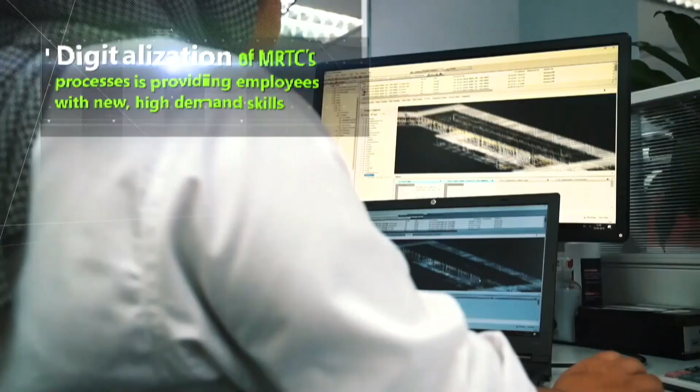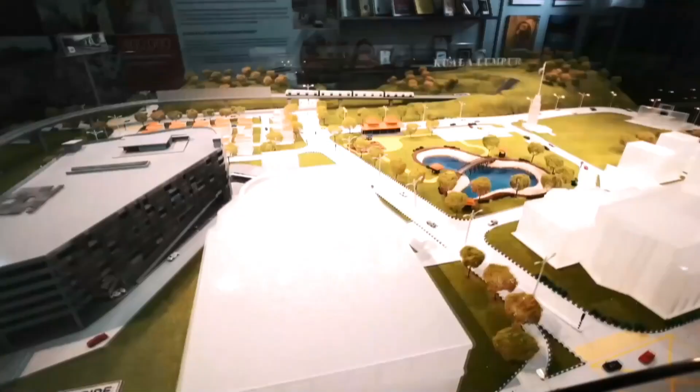The KV MRT system is providing a major boost in the integration and efficiency of urban public transport. The country's largest infrastructure project is already having a significant economic impact in Malaysia and within the region. As the first metro project in Asia Pacific to ensure greater collaboration and efficiency across teams with building information modeling, or BIM, methodologies, the SSP line is expected to be delivered on schedule and on budget.

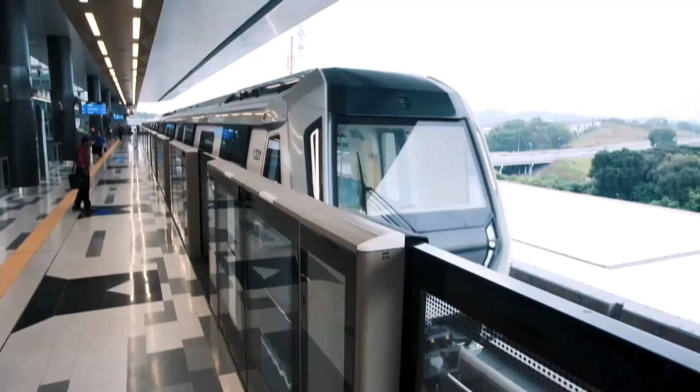Taking advantage of digital technologies for its SSP line, MRTC is improving connectivity for local and regional businesses, expanding workforce skills, attracting international investment, and increasing property values across the Klang Valley region. Digital transformation is helping transform the lives of millions of Malaysians today in preparation for a better tomorrow.

Earlier this week, I got a chance to meet some key Queensland government agencies, and I'm really impressed to learn that there's a lot of opportunity for Brisbane for infrastructure development. As one of Australia's fastest growing cities, there are parallels between Brisbane and Kuala Lumpur, notwithstanding the differences in population and population density, of course.

Brisbane has around 2 million people spread across 6,000 square kilometers, while KL has 6 million people in around 2,800 square kilometers.

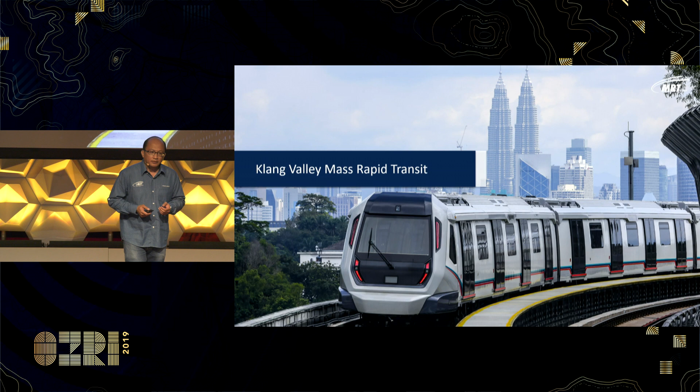So I have come today to share with you the story behind the Klang Valley Mass Rapid Transit project, and also to take you behind the scenes of what the media has dubbed Asia's most ambitious engineering project, and to show you details on how MRT Corp has embraced digital engineering in the MRT Sungai Buloh Serdang Putrajaya project.

It all started back in 2010, when the Malaysian government had the vision to create a new economic region, called Greater Kuala Lumpur. This economic region is designed for massive income spillover that will positively impact our gross national income.

20-20 vision is the government's vision for the Greater Kuala Lumpur. The first 20 is to turn Greater Kuala Lumpur into one of the top 20 most livable cities in the world, and the second 20 is to become one of the top 20 economic cities in the world.

As the economy grows, the population is also expected to increase, hitting more than 10 million by 2020. This increase will create high demand for an efficient, dynamic intra-city public transport system.

To address the future demand for mobility in Greater Kuala Lumpur, a 3-line mass rapid transit system has been planned, comprising 2 northwest-southeast radial lines and 1 circle line looping around Kuala Lumpur. This project is called Klang Valley Mass Rapid Transit.

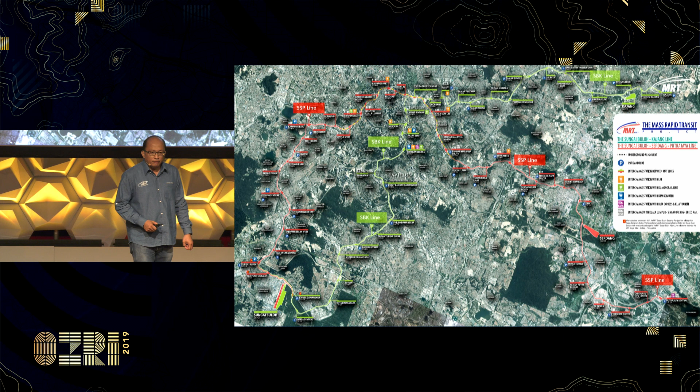Shown here is the entire KV MRT alignment for both MRT Line 1 and MRT Line 2. The MRT Line 1, or SBK, displayed in green, was opened to the public in July 2017, and the MRT Line 2, or SSP line, displayed in red, is currently under construction and due for completion by July 2022.

This is the conceptual alignment for our third line, the MRT Circle Line. The project was due to start mid-2018 and be completed by 2022, but it was put on hold in view of the current government's financial standing.

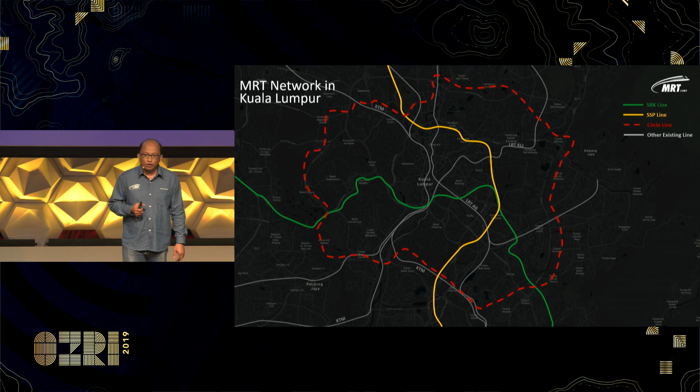The entire alignment of the SSP line is 52.2 kilometers, consisting of 13.5 kilometers underground tracks and 38.7 kilometers elevated tracks. It will serve a corridor of population around 2 million from Putrajaya to Sungai Buloh. The MRT line will have 35 stations, of which 24 are elevated and 11 are underground.

The picture shown here is the rolling stock, which was awarded to Hyundai Rotem from South Korea. This rolling stock will include 58 4-car driverless electric trains, which can carry up to 1,200 passengers at one time.

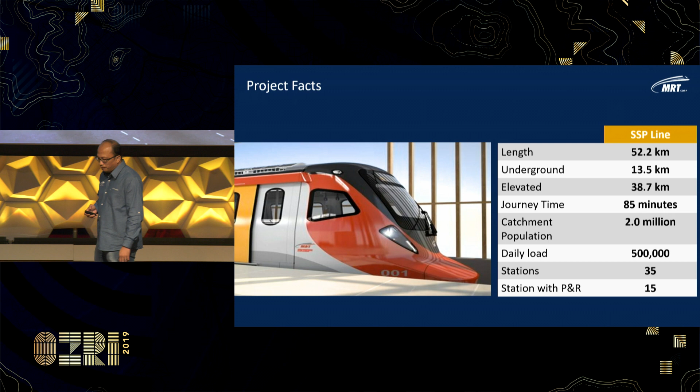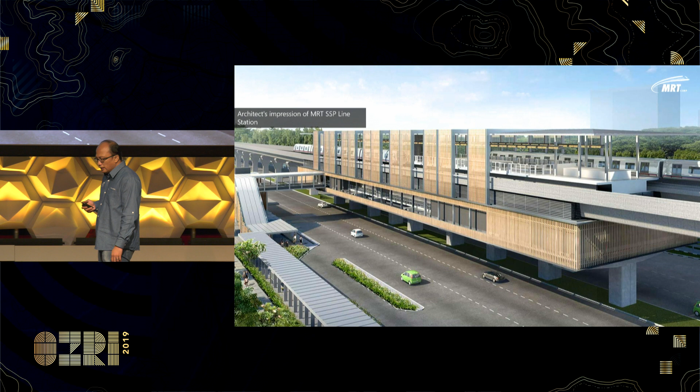This is the architect's impression of the MRT SSP line elevated station. The elevated station architecture was inspired by the concept of the Serambi at the village house or longhouse. This concept provides open ventilation, natural lighting, and natural visual effect via the play of light and shadow.

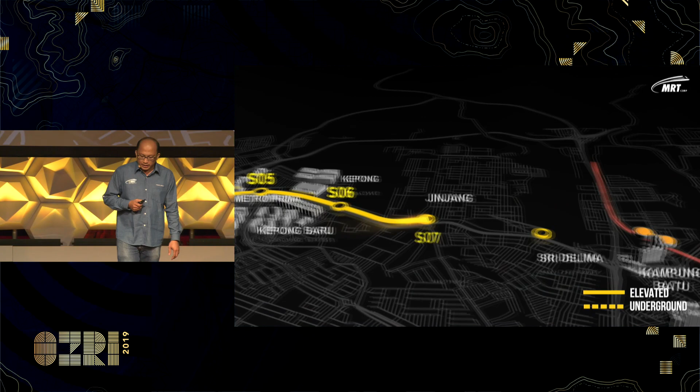The SSP alignment will start from the existing Sungai Buloh depot and pass through residential areas in the northwest of Klang Valley, then through a few suburbs, mainly residential areas. Once it reaches the city center, the train will start going underground from the North Portal, going through the major commercial area, including the Petronas Twin Towers, and back to the elevated alignment at the South Portal.

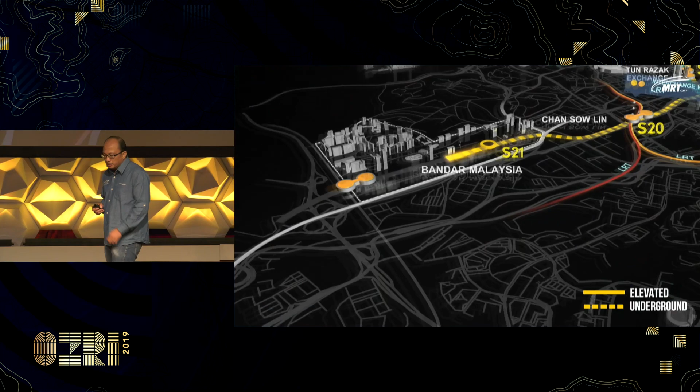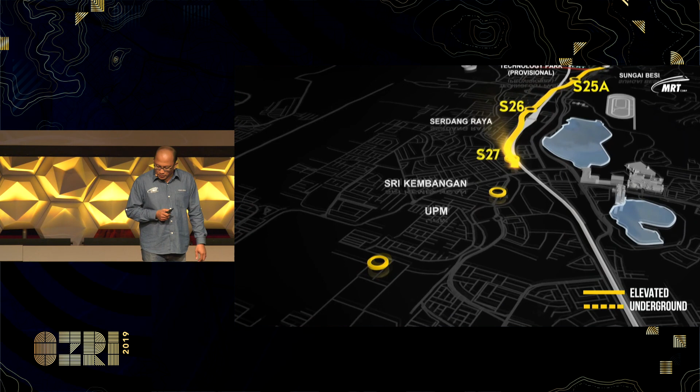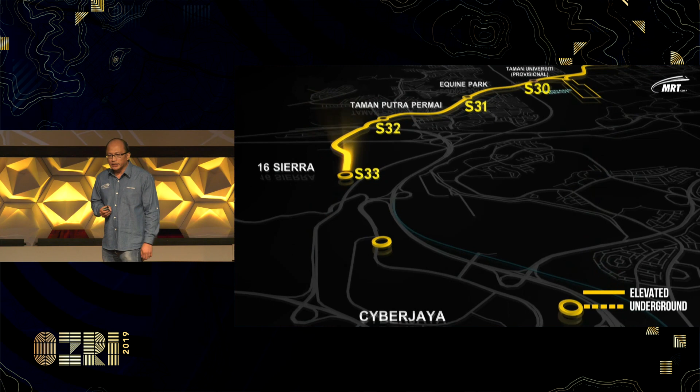The line will continue to southeast of Klang Valley, which will pass through other suburbs, mainly residential area, universities, our second depot, commercial area, residential area, and our IT park, which is Cyberjaya, before terminating at Putrajaya, our government administrative center.

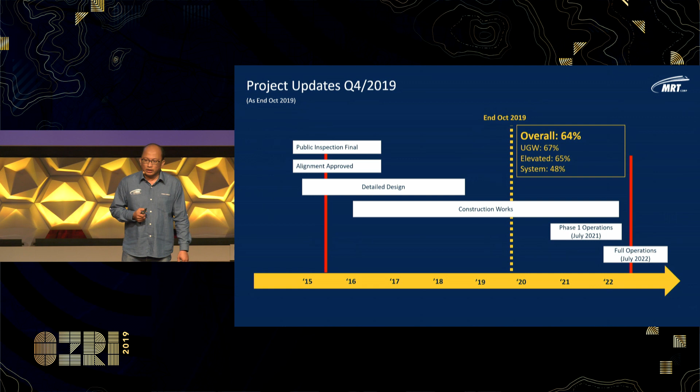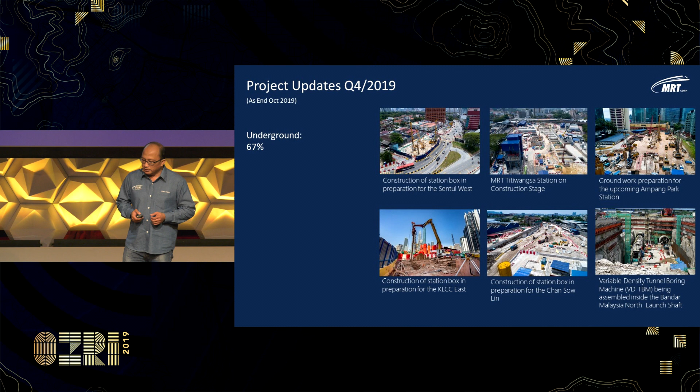Next, I would like to share some of the challenges that we have in our project team and how digital engineering has become a great help to overcome all these challenges. The MRT SSP line consists of over 1,000 multidisciplinary professionals like architects, engineers, planners, geologists, and controllers. These people are the heart of MRT SSP line project, and they are responsible to deliver the project within time, within budget, to the government of Malaysia.

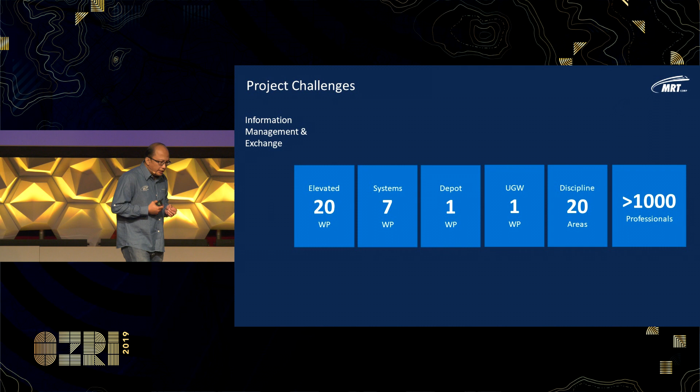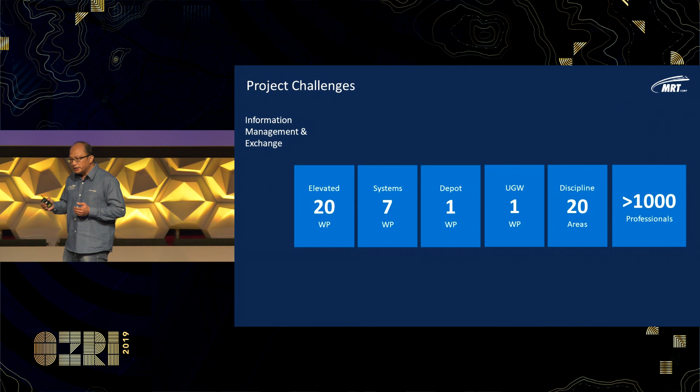Our work involved the design and the construction of the SSP line project. These include underground station, elevated guideway, depot, tunnels, as well as the electrical and mechanical system required to complete a fully functional railway system. It is very important for us to ensure the information available across the project is accurate, up to date, and no misinterpretation between stakeholders. We need to ensure the design information, as-built, and as-built validation has been managed and kept within the project, as the MRT structures will have a long lifespan, which is over 100 years.

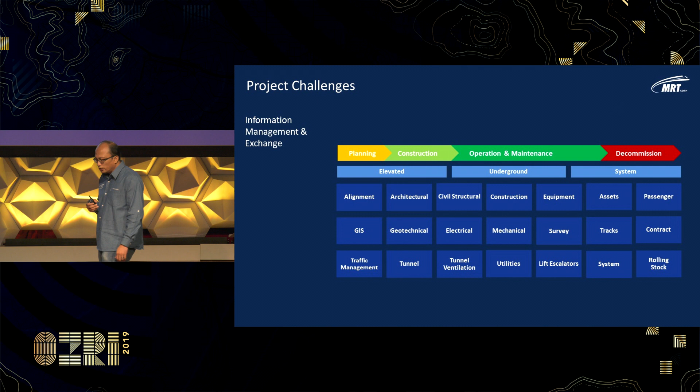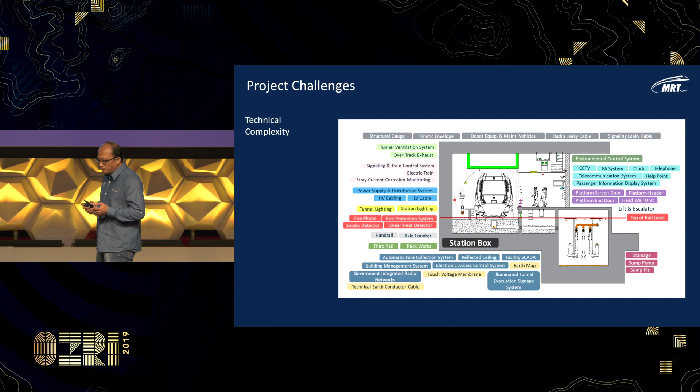Next is the technical complexity of the design. This illustration shows how complex it is to design and construct the MRT station. This involves cross-functional and multidiscipline fields within a tight schedule. The engineering design information needs to be organized systematically and in a structured way so that it is easy to retrieve. The attributes need to be updated correctly according to the project classification.

To overcome these challenges, MRT Corp has embarked on a digital transformation program for the design and the construction of the project. The main objective of the digital transformation program is to improve the project productivity by 35%. And in order for us to achieve this, we are pushing 6 digital engineering initiatives into our project. We are mandating the use of BIM Level 2 framework for our underground and system work contractors to carry out design and also construction in the common data environment following BS 1192 standard.

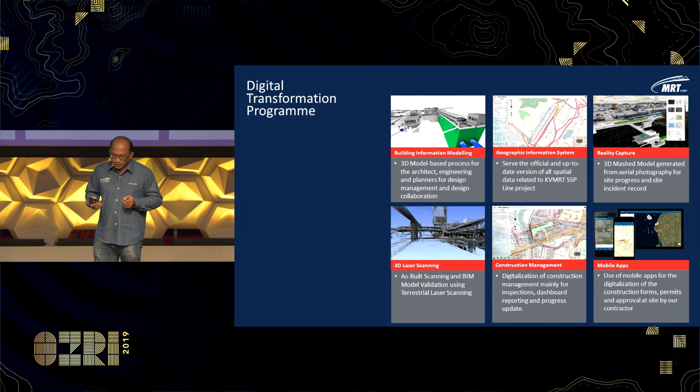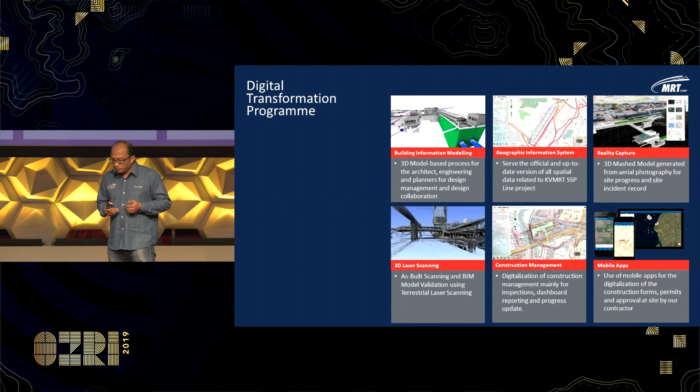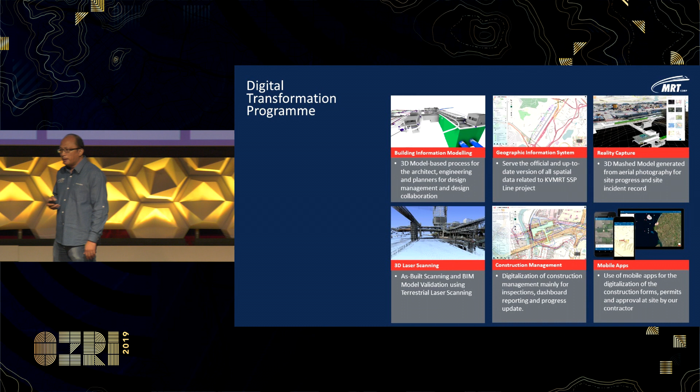We developed a GIS web portal to host all our design and engineering information, utilities, as-built and construction models. We also utilize reality model drone for site progress and monitoring. We also use 3D laser scanner for as-built model validation and verification. Together with our contractors, we are pushing paperless, mainly for the inspection, dashboard reporting, and progress update. Finally, we're also pushing the mobile app for the digitalization of the construction forms, permit, and approval at site by our contractors.

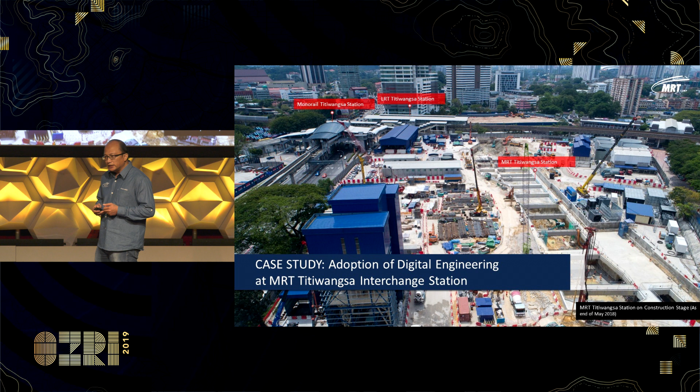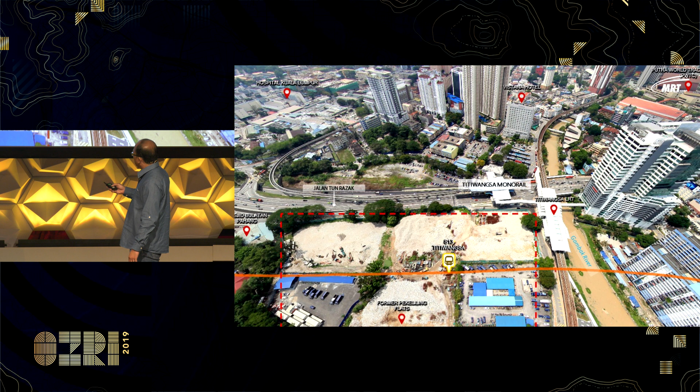Next, I would like to showcase some of our work on how we have applied digital engineering in the design and the construction of the MRT SSP line project. The MRT station is one of the stations located in the city. So this is the future station that we are going to build. And this is the existing station. This monorail service and LRT Titiwangsa service is already there. So the future MRT station is intended to be an interchange station that will be integrated seamlessly with these two stations.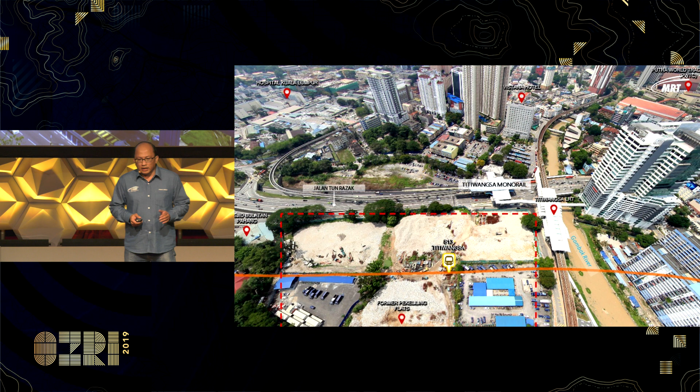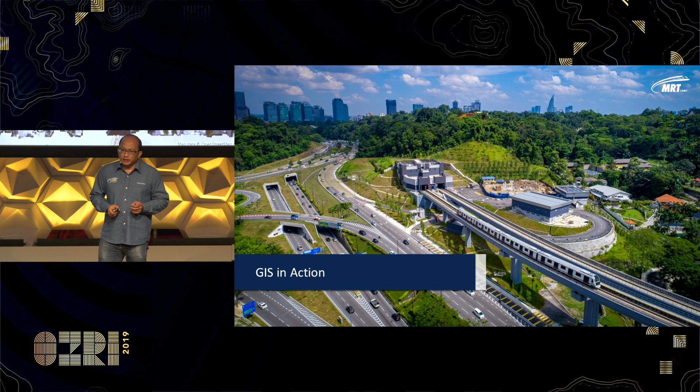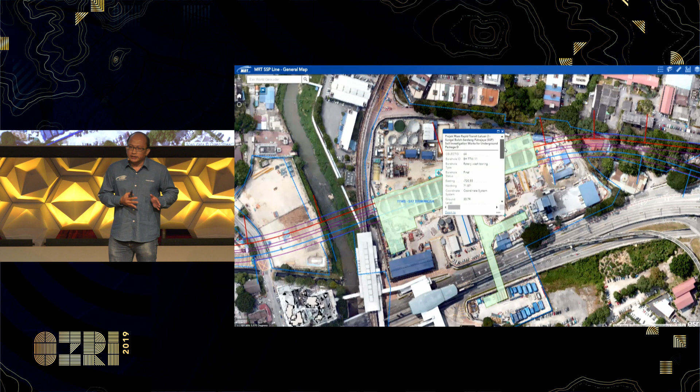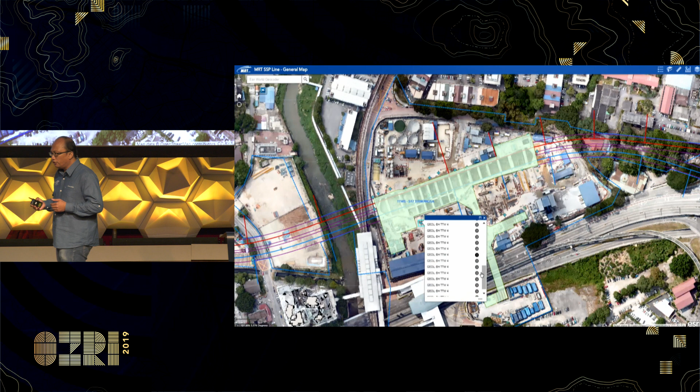Now, I would like to share how GIS has been used in this program. For this project, our geospatial portal is using ArcGIS Enterprise. We are currently compiling all engineering drawings, spatial information, documents, and records into a centralized mapping viewer. This video shows a collection of soil investigation boreholes that we have converted from AGS4 format from our geotechnical team. The AGS4 is a text-based format, and it contains all detailed information about soil profile. For us to bring this data into GIS, we have developed spatial conversion tools, and now the geotech engineer will have the ability to see the borehole reports together with the visual representation.

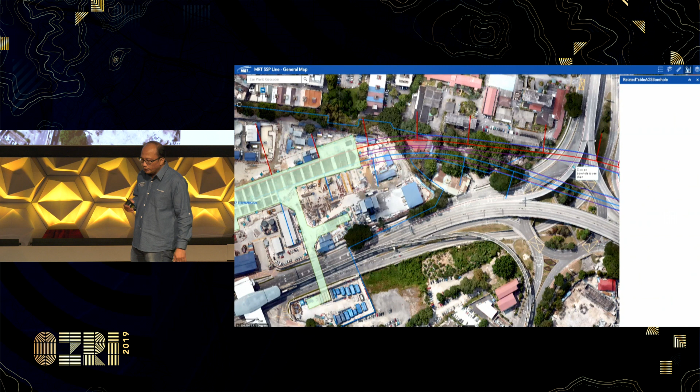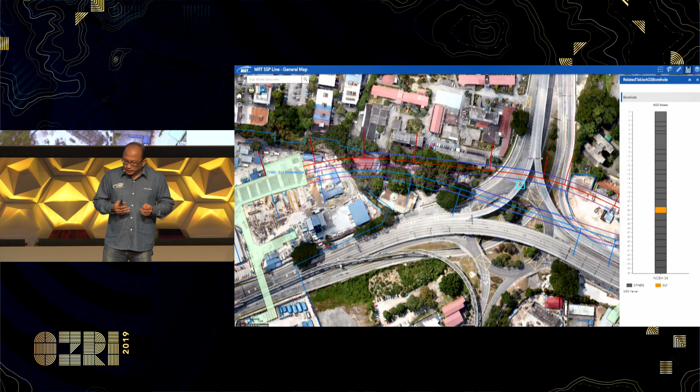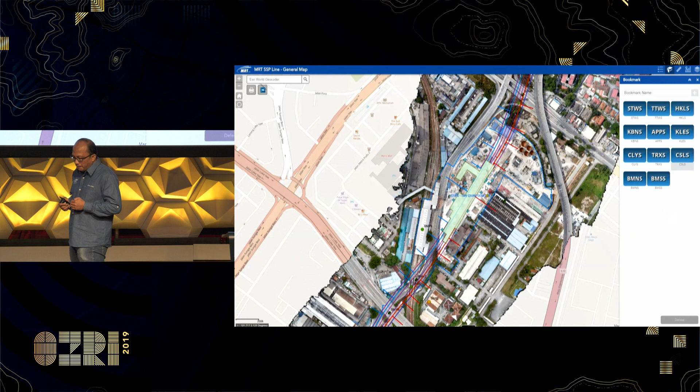We also created a widget to highlight the depth of the soil type for each borehole. It will provide a graphical representation of the soil depth. Here is the video showing a few boreholes in a customized widget viewer that highlights soil profile and soil depth.

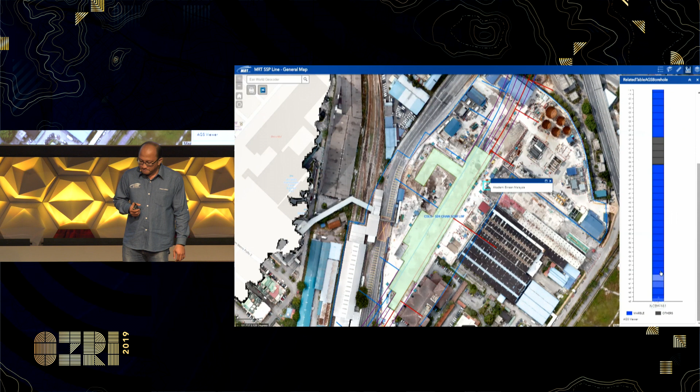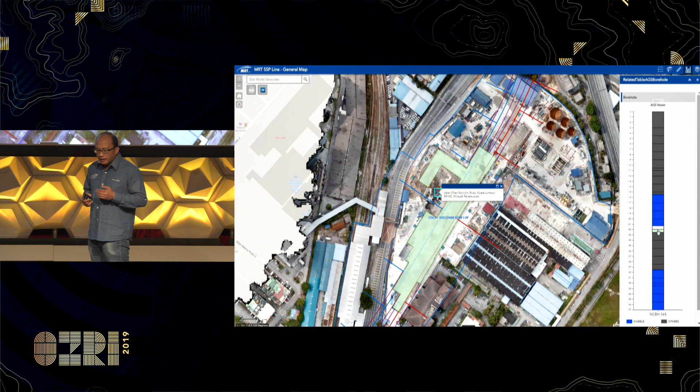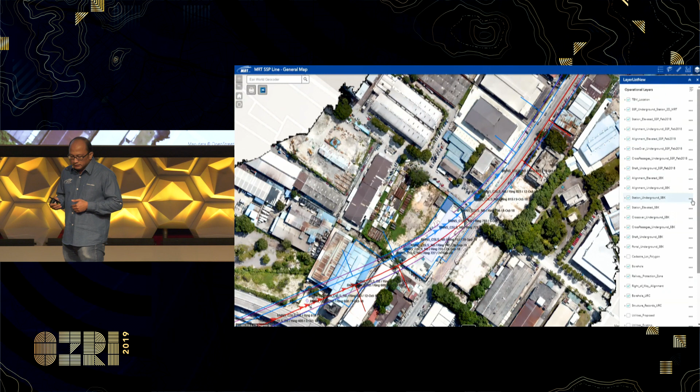In addition to the compilation and also the presentation, we have also developed an API and interface with Leica Geosystems tunneling software. The purpose of this API is to map the tunnel progress every day into our GIS portal. This information, like tunnel position and ring progress, is being tracked daily in our GIS portal. So you can see the progress that has been made by our TBM machine from this location.

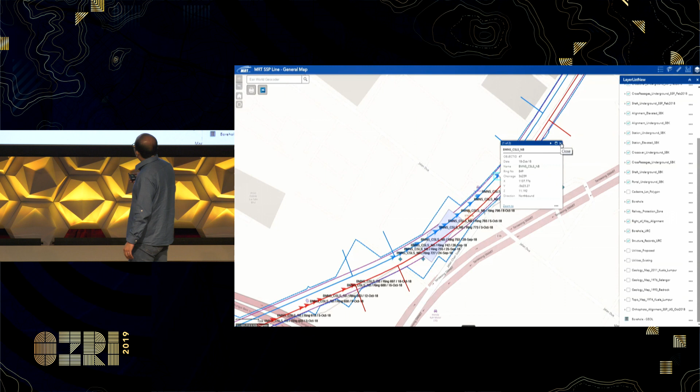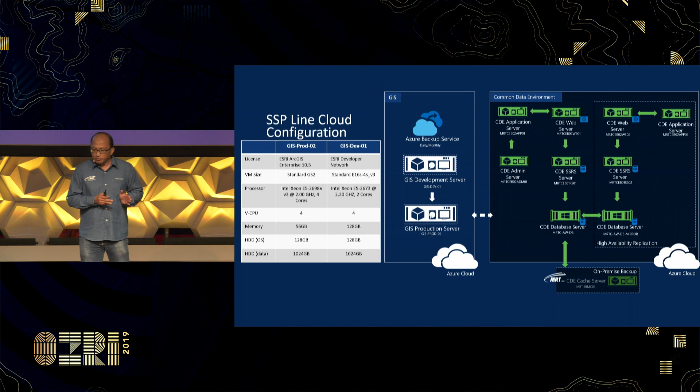For this project, we have moved from on-premise server to cloud-based server implementation, which provides better reliability and availability of our project data. We are adopting Microsoft Azure Cloud for both GIS production and development servers. These servers are fully interfaced with KVMRT CDE, and we are also replicating both servers in cloud and on-premise to back up and protect our project data.

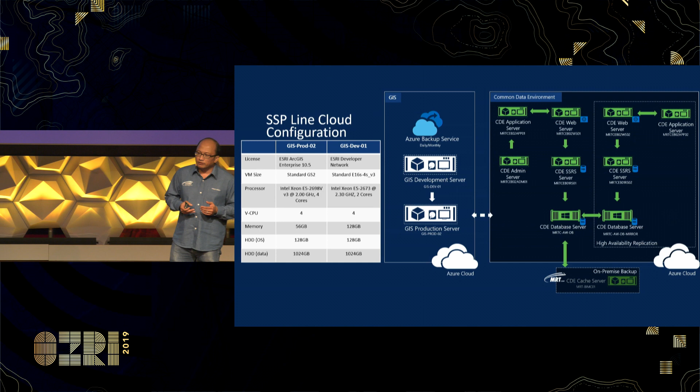We are also proud that we are the first project in the Asia region to have ArcGIS Server Enterprise on full cloud configuration deployment. Next, I'm going to share things that keep us busy every day, fusing GIS data with BIM and reality models for this project.

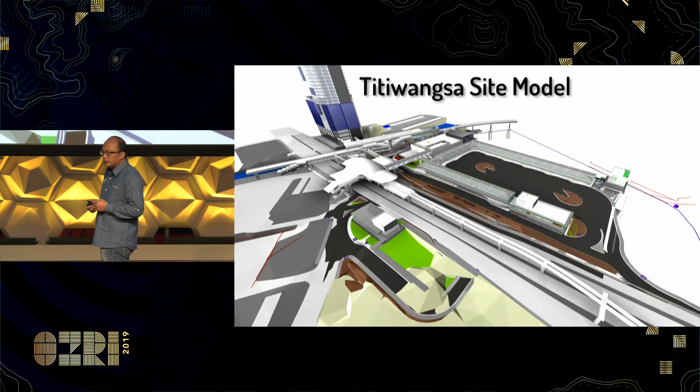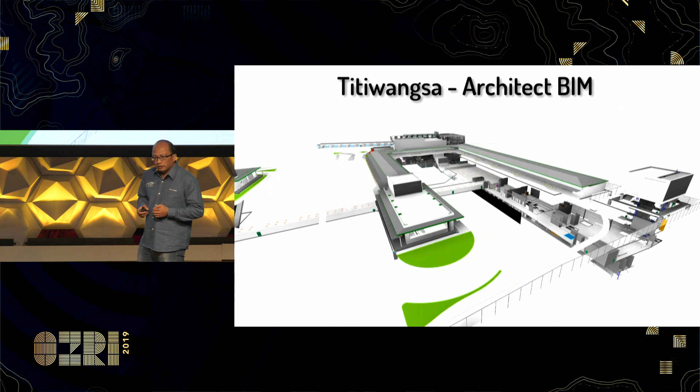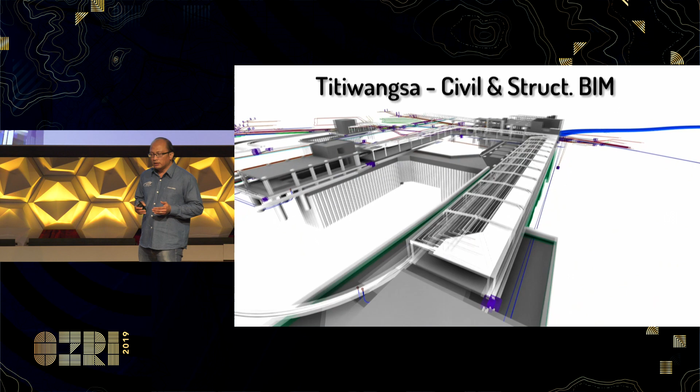The SSP line is one of the first in the Asia region and among very few in the world to implement BIM level 2 for an infrastructure of this scale and complexity. This model demonstrates the station design complexity in 3D, and it allows our engineers to visualize, collaborate, and analyze every aspect of engineering in a virtual world for the design and construction process.

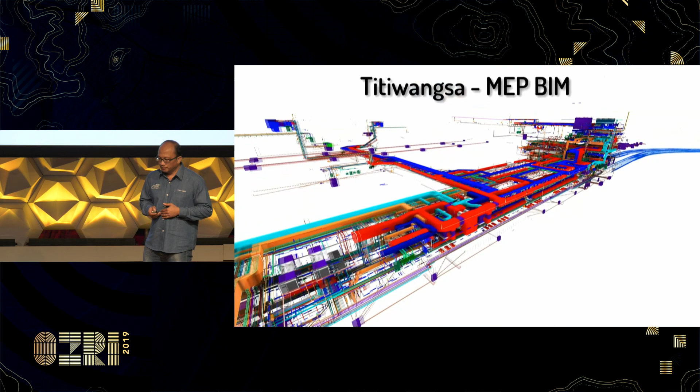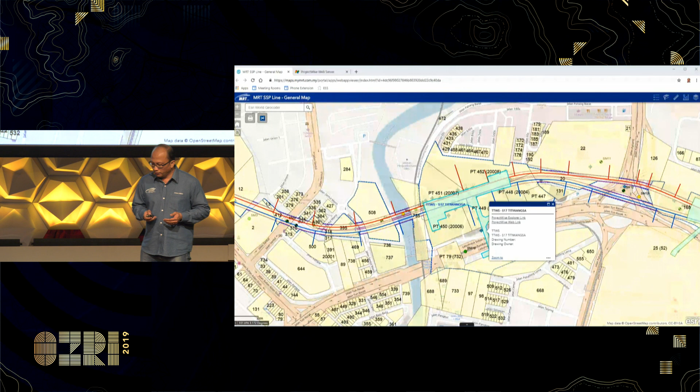To help our engineers retrieve the Titiwangsa model quicker, faster, and more intuitively, we have interfaced our GIS portal with the project CDE infrastructure directly on cloud. Engineers can retrieve this model directly from the map viewer using simplified interface pop-ups and attributes linked directly to the model using ArcGIS Pro.

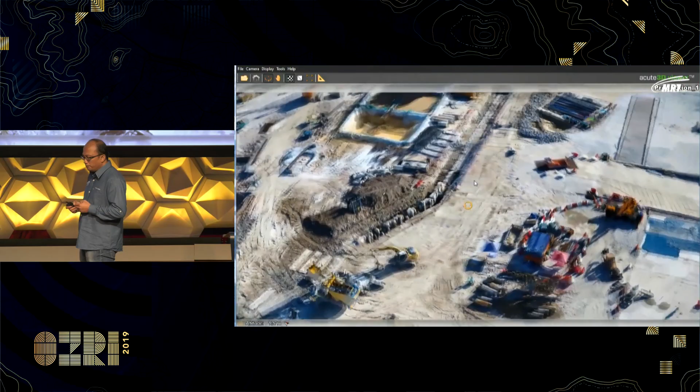We are also pushing the boundaries and setting up benchmarks in various aspects of the project development. Among them is the use of the reality model. The reality models are being used by our engineers to review the current progress at site, conduct visual inspection, perform measurement, and review stockpile volume. What you see here is the reality model of Titiwangsa Station and the detail of the construction progress.

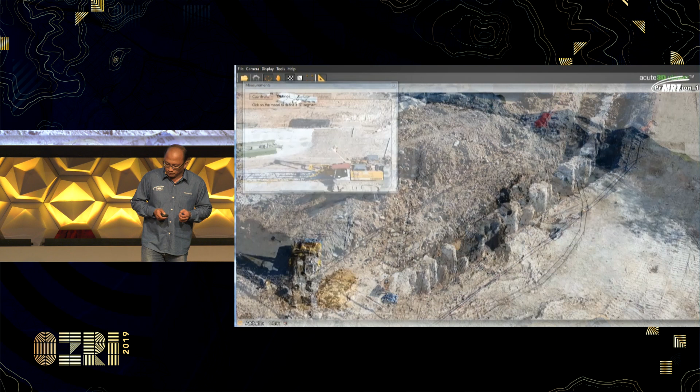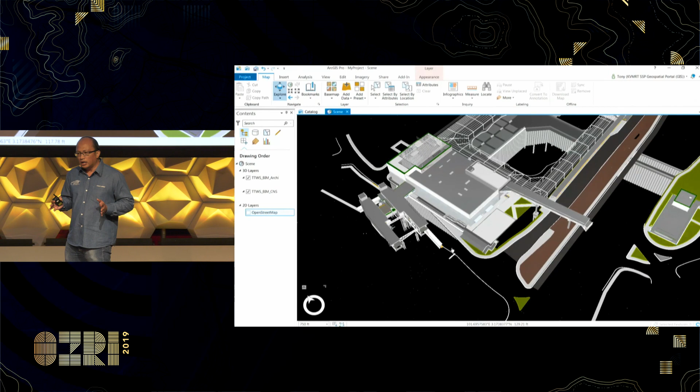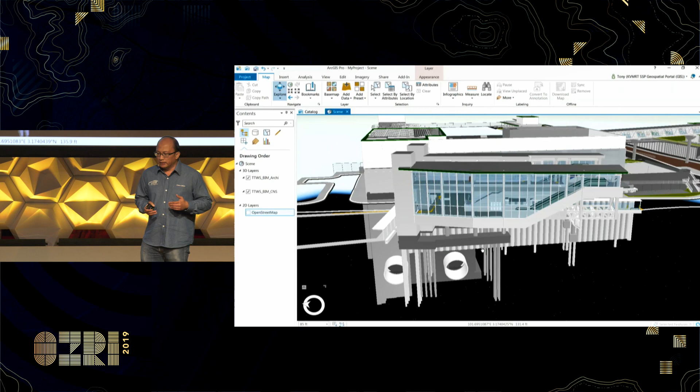We have a monthly program to capture reality models for all our underground sites. The scene layer output in Esri i3s format is reviewed, compared, and fused with the BIM model in ArcGIS Pro before we publish the model unified into the 3D scene viewer. This video shows the monthly routine by our GIS engineer reviewing the current construction progress using the BIM model and latest reality model in ArcGIS Pro.

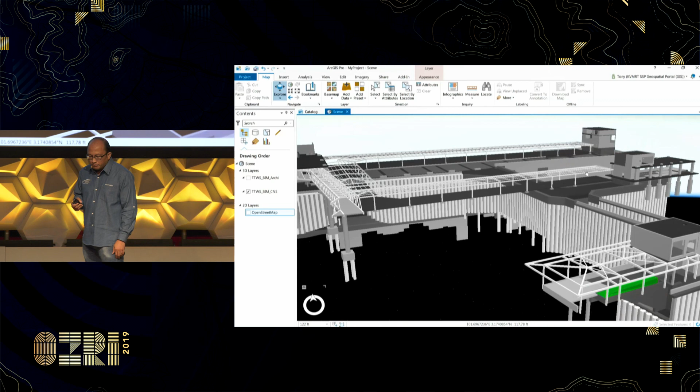Once the 3D model is ready, we are able to fuse this model as one unified model before publishing into Esri 3D web scene. We also utilize 3D laser scanning, mainly for as-built. This technology allows our engineers to find out the detailed structures of the viaducts, height clearance, and structure type.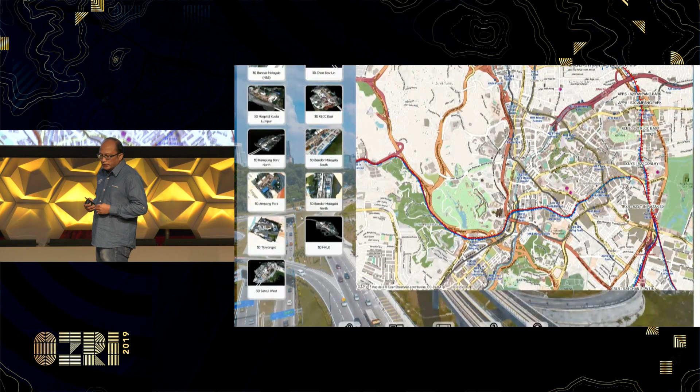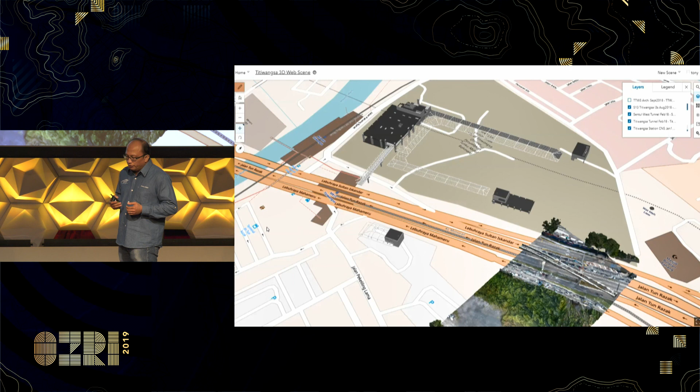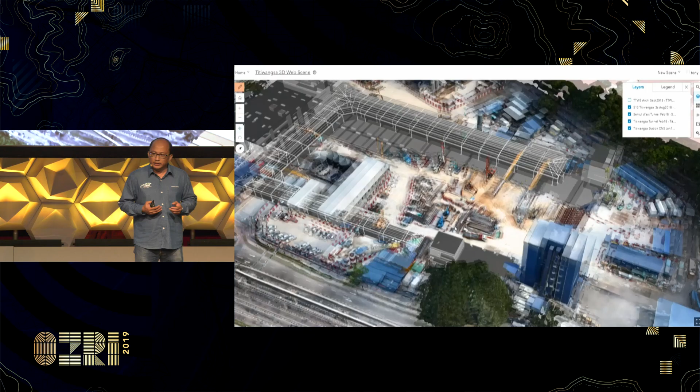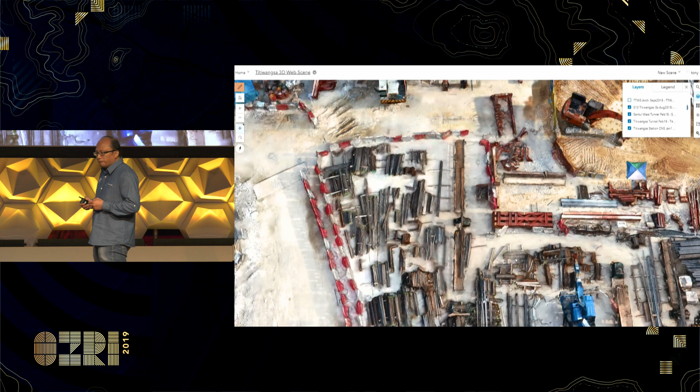We also host the unified model in our GIS portal for our project team to see the site progress virtually on cloud. The 3D web scene viewer is able to fuse multiple types of information such as street map, aerial photography, 3D model, and reality model into a unified 3D viewer. Our project team is heavily using this information from the site office and the design office to understand site context, review site progress, and inspect any site incidents.

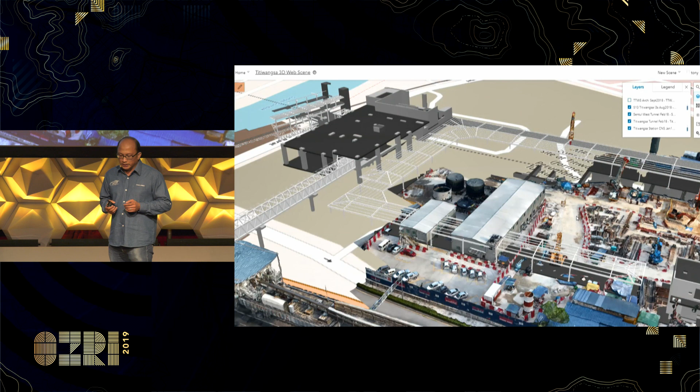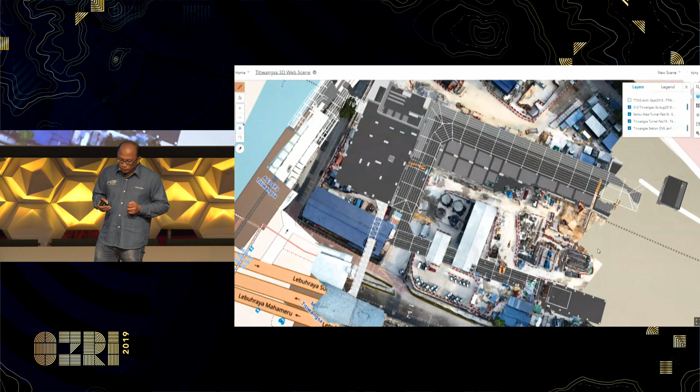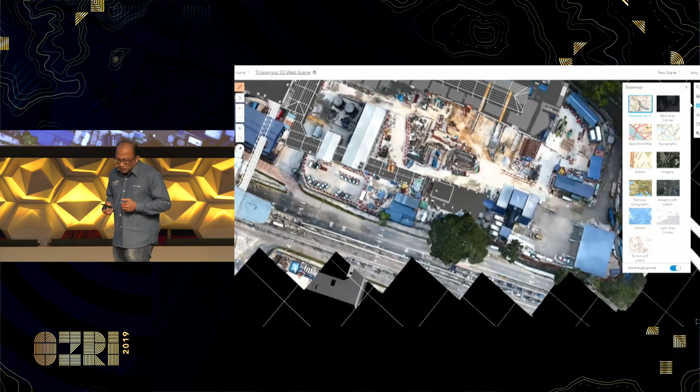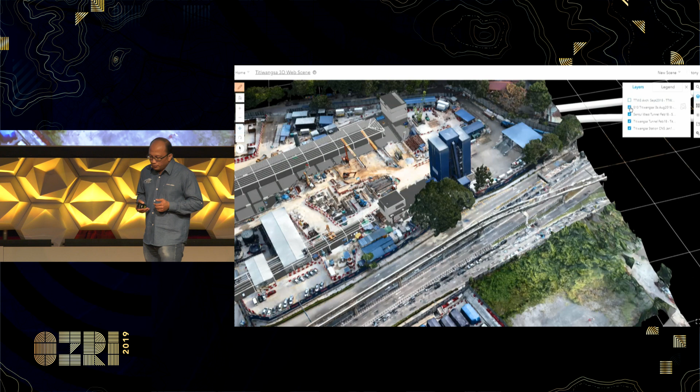In this video, you will see all engineering designs are from the BIM model that are being published into the 3D web scene viewer. The BIM models are the architecture model, structure model, and later you can see the tunnel model. All these models are very detailed and complex. Not just the model, we are also bringing the attributes and classification from the BIM model into this viewer. These attributes help our project team understand the full context of their review. So here you can see the attributes that we have brought from the BIM model.

Our journey is not ending here. We are continuously harnessing ArcGIS technology for our corporate GIS application. We are developing a comprehensive GIS database for our development and building control, which will contain all MRT SBK line design information, engineering drawings, and electronic plans. We are also testing Collector and Survey123 apps as field mapping and data capture tools for our engineers to monitor encroachment, zone violation, and illegal activity in our protection zone.

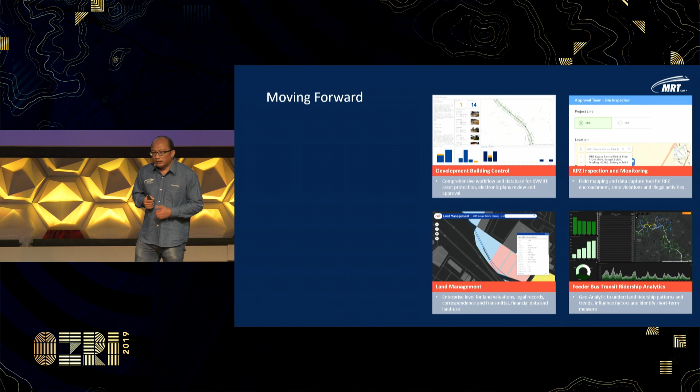We are also developing a land management database using ArcGIS Online for our land management team to capture all land-related information, valuation, legal records, correspondence, and financial data. And finally, we are also looking at ArcGIS GeoAnalytics to understand our feeder bus ridership patterns and trends, and later address our last mile connection issues.

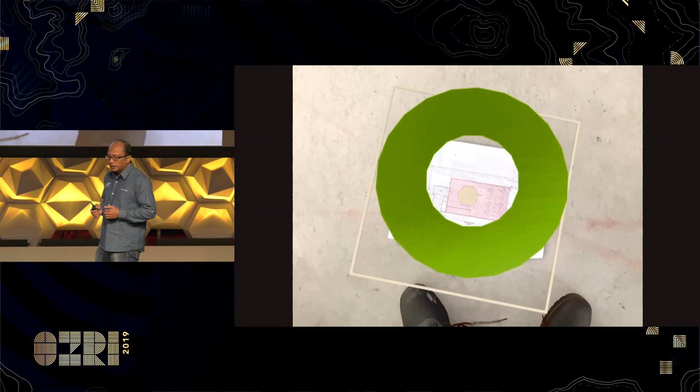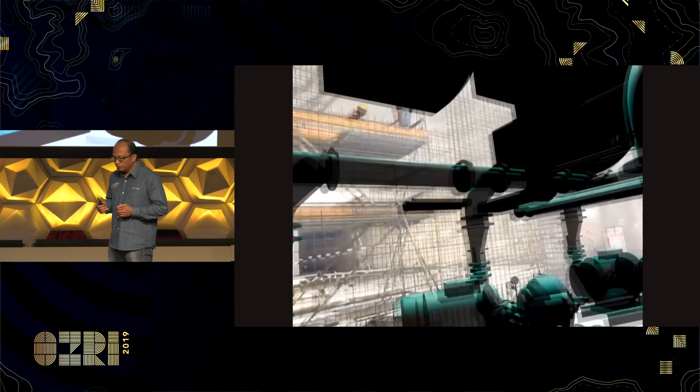We are also recently trialing augmented reality using our BIM data, and here is the video showing the progress. The augmented reality was developed using BIM data and a gaming engine. Once the engineers are able to geotag the site location, this model can be loaded using a tablet on site. We have found a few use cases for augmented reality in the construction project.

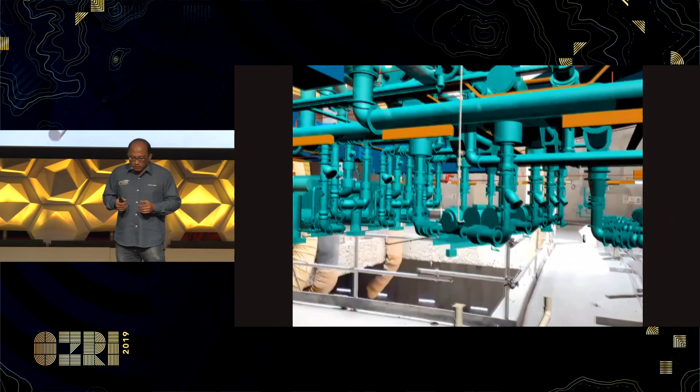Among them, AR can be used for space coordination and confirmation. AR can also be used at a job site with a live walkthrough. And finally, we can communicate any discrepancies during construction activity with the other teams.

Now, we have come to the end of the presentation. I hope you have learned something new today on how MRT Corp has utilized digital engineering in the SSP line project.